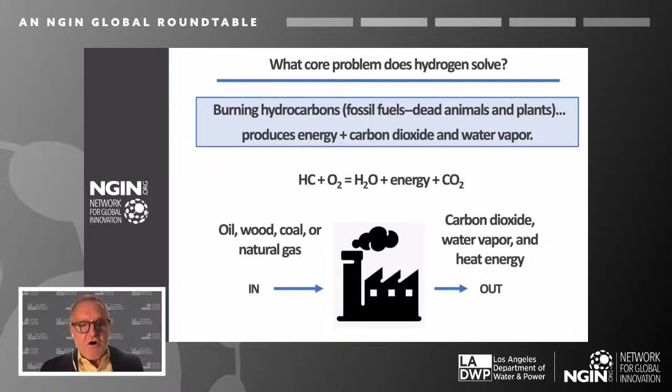In every fossil fuel plant, when we burn hydrocarbons, we produce carbon dioxide, and that's the core problem we want to solve. We want to get rid of the carbon in energy production.

So let's say we just burn hydrogen, which is combustible all by itself. You can see in this new formula that all we get out is water vapor and energy, no carbon dioxide. So no carbon in, no carbon out, no carbon dioxide.

One way to do this is in a gas turbine, very similar to the turbines that we currently use to burn natural gas or methane. The turbine has to be modified to deal with the higher temperatures in burning hydrogen, but the process is pretty much the same. We turn the chemical energy of hydrogen into heat, which produces the mechanical work of the turning turbine, which drives a generator, which produces electricity.

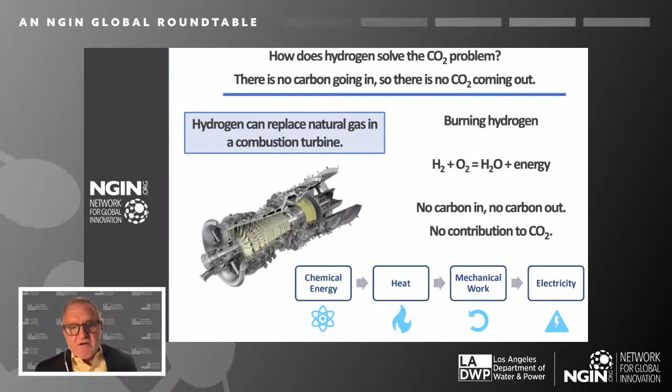Now, there is another way to burn hydrogen, and that's through the chemical reaction inside of a fuel cell, skipping the heat and mechanical energy steps. But the chemical reaction is the same. Hydrogen is combined with oxygen from the air, producing water and energy, in this case, electrical energy directly. Hydrogen in, water out, with no combustion and no carbon dioxide.

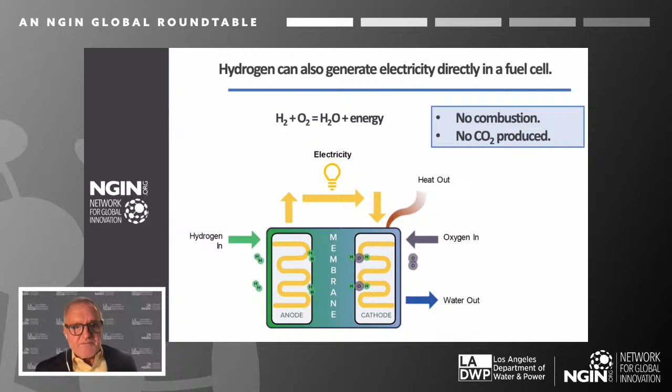So hydrogen can be used to generate electrical energy in a combustion turbine or a fuel cell without producing CO2. Kevin Peng will go into a lot more detail later in describing a LADWP project that does just that.

But hydrogen has a much larger role to play in removing carbon from the atmosphere. The mechanical energy from hydrogen can be used directly or indirectly for transportation. We can provide combustion heat for use in industry, like cement kilns or for heating buildings. And hydrogen is already used for industry as feedstock for fertilizers, plastics, and glass.

But perhaps the most important near-term factor in commercializing hydrogen technology is hydrogen's use in storing electricity from renewable energy. We can use the variable inputs from solar, wind, and hydro to make hydrogen, and then store hydrogen indefinitely and deploy it to provide a supply which is in line with demand. And we can do this on a very large scale and for longer durations than we can with batteries.

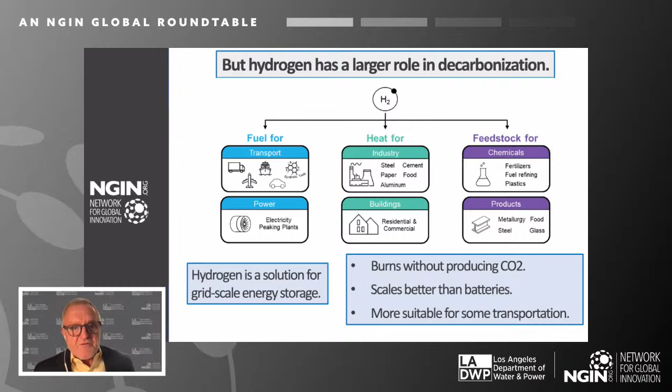So let's have a look at what a hydrogen grid might look like. In the upper left-hand corner, under production, you'll see renewable energy sources which drive hydrogen production in electrolyzers. We'll talk about electrolyzers in a minute, but basically electrolyzers split water, H2O, into hydrogen and oxygen and send the hydrogen through pipes or storage tanks where it's needed.

We can store vast amounts of hydrogen in underground caverns and further deploy hydrogen for use in utility scale electric production, industrial uses, transportation, or for buildings for heat.

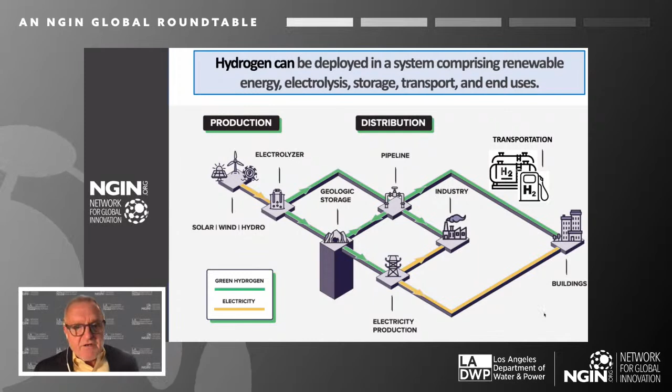One big advantage that hydrogen has over other molecules like natural gas or gasoline is that we can store more energy in a given weight of hydrogen than we can, say, in gasoline or diesel. This is known as energy density. However, hydrogen is a gas at ambient temperature. It takes up more volume than, say, gasoline, so that's a disadvantage. We can partially compensate for that by compressing hydrogen gas so it takes up less volume.

In a hydrogen-driven car, for example, we compress the gas to about 700 bar, or 10,000 pounds per square inch, before we pump it into the car's hydrogen tank. That fuel tank is about twice as big as the one in a gasoline car for the same range, but it weighs a lot less. So there are advantages and disadvantages. But the main advantage of hydrogen is that no carbon dioxide is released, and its fuel tanks are still a lot smaller than the batteries take up in, say, an electrical vehicle, which is also carbon-free.

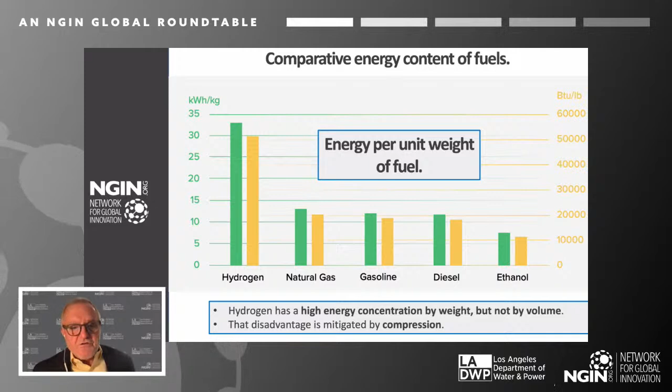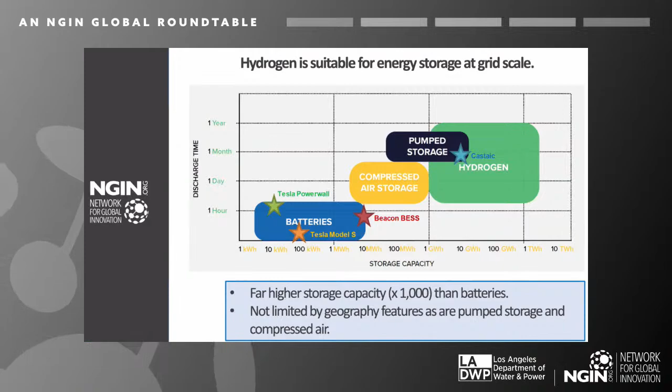If there's one key lesson in this entire presentation, it's the importance of hydrogen in energy storage. Renewable energy from solar and wind cannot produce a carbon-free economy without massive energy storage. We all know that solar and wind are variable and are not matched with demand. That's true both on a daily basis and also on a seasonal basis over periods of months. So we need very large-scale energy storage to make renewables work.

Batteries are only good for small storage in the 1 megawatt hour range and good for hours at a time. We can compress air into underground caverns and release that air to drive turbines on a scale of about 1,000 megawatt hours. But that's limited by geographical features and shorter scale, like a day.

In pumped hydro, renewable energy can supply energy to pump water, say, from a river up to a mountaintop reservoir, and it's released back to the river to get back that electricity over longer periods of time, but still limited by available geographical features. The stars on the chart above are examples of storage systems. Beacon and Castaic, for example, are LADWP projects, by the way.

One is a utility scale battery and the other is pumped hydro. But only hydrogen can store energy in the hundreds of gigawatt hours and for periods of months. So if hydrogen is going to be required to enable renewable energy to fill its ultimate mission, then a hydrogen infrastructure is inevitable. This is why hydrogen cannot be discounted in a carbon-free, environmentally sustainable future.

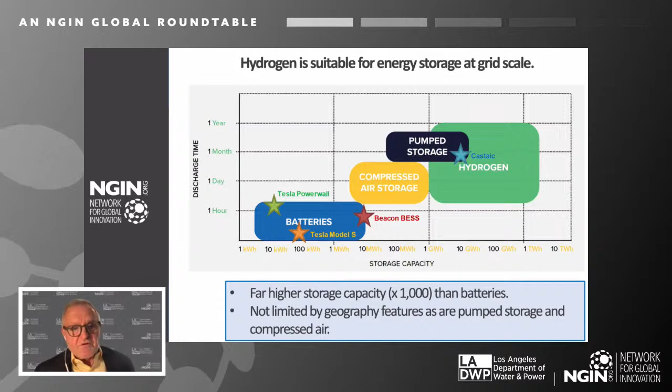So how is hydrogen used today? Virtually all hydrogen, like 100%, is used as chemical feedstock. About half of that is for producing petrochemicals, and about 40-some percent for producing ammonia, and most of the ammonia is used for fertilizer. We'll talk more about ammonia later. But as of today, far less than 1% of hydrogen is used for power and transportation, and that has to change.

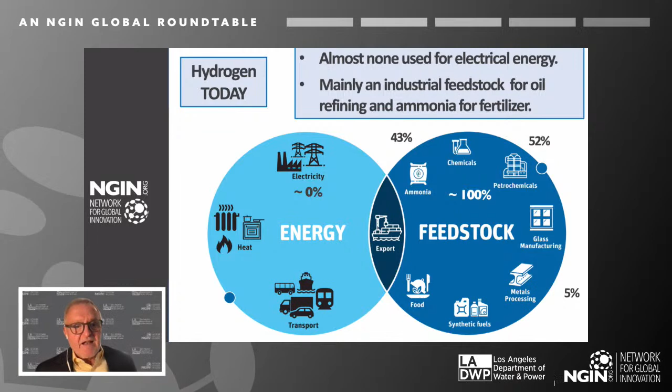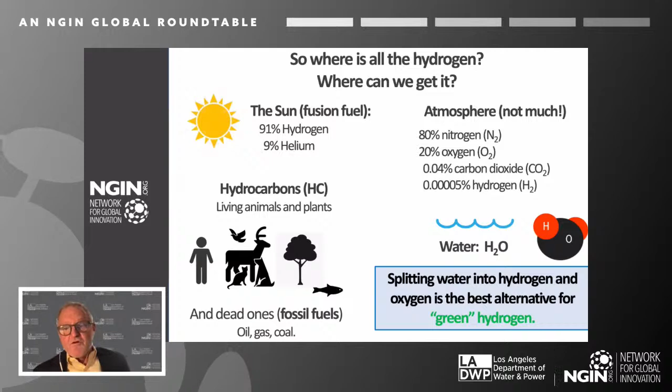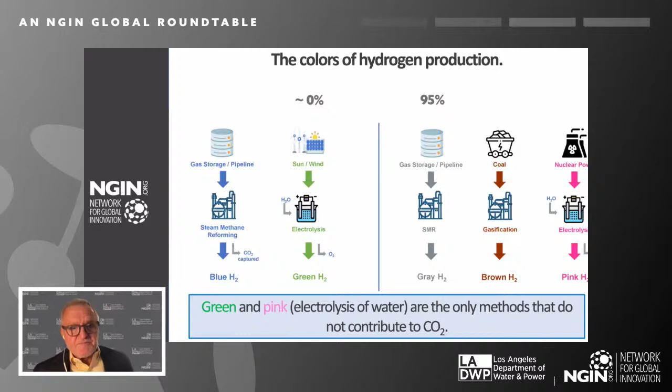I do want to show how methane reforming works, because almost all hydrogen today is used in this process. We start out with methane, CH4, and that's essentially natural gas. We mix methane with steam, go through some processes, and at the end of that process, we end up with hydrogen. But because we have carbon going into the process through the methane, carbon's got to come out of the process, and it comes out using CO2. Of course, this defeats the whole purpose of making hydrogen for clean energy, because we've already released CO2 into the atmosphere before we get the hydrogen. Again, we can capture some of that, but not all of it, and there are methane losses along the way.

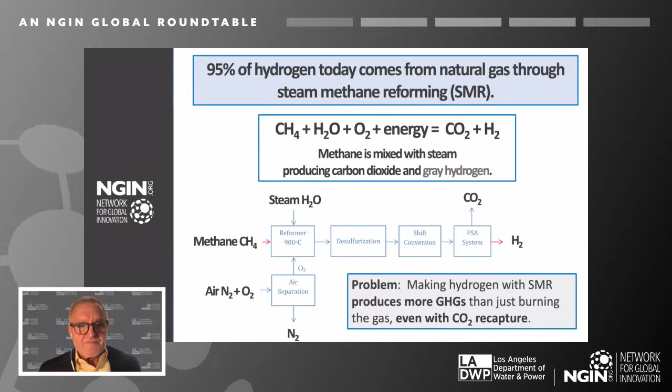Green hydrogen... oops.

So finally, here's how we make green hydrogen, in a system called an electrolyzer. We use electricity to split water molecules into hydrogen and oxygen. When I was on submarines years ago, we were underwater for 3 months at a time, and we had to make our own oxygen. We used exactly the same process, except that we pumped the hydrogen overboard and kept the oxygen to breathe. Electrolyzers do the same thing, except that we release the oxygen to the atmosphere and keep the hydrogen. About 80% of the cost of producing hydrogen in this method is the cost of the renewable energy used to power the electrolyzer. And as Fred indicated, the cost of that renewable energy is going down every year.

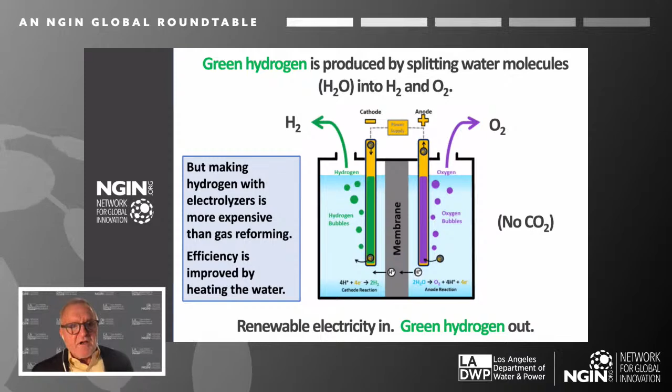The process itself is being improved, for example, by using waste heat from industrial processes to heat the water in the electrolyzer, so it takes less electrical energy to break up the water molecules. So we're improving the economy and efficiency of producing green hydrogen every year.

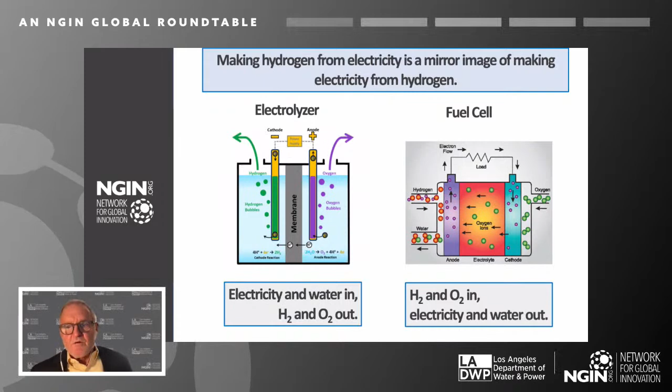In this slide, you can see the electrolyzer we just discussed next to a fuel cell we reviewed earlier. As processes, they are mirror images of each other. To make hydrogen, an electrolyzer takes electricity and water in, and produces hydrogen and oxygen out. In a fuel cell, it's the opposite: hydrogen and oxygen in, electricity and water out.

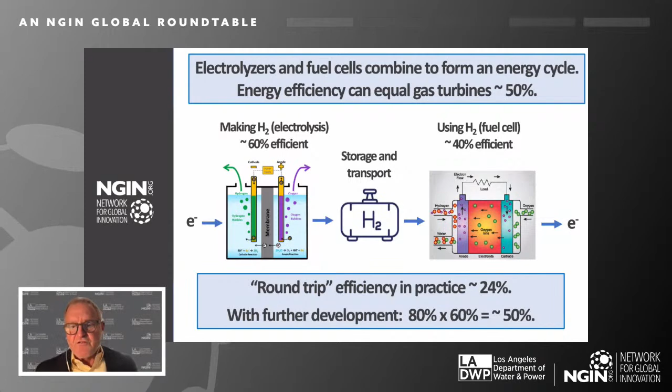It's not great, but it's all driven by solar and wind, and no CO2 is produced. With further commercial development, we can double this efficiency, and many companies are on the way to achieving this goal. Well, back to energy production.

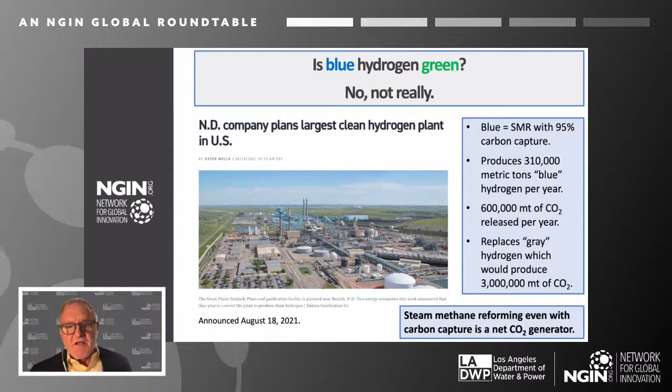As Kevin Peng of LADWP will confirm later, we're interested in green hydrogen in the form of electrolysis. But you'll hear a lot about blue hydrogen from methane reforming and carbon capture. Yes, blue hydrogen is cleaner than gray hydrogen without carbon capture, but the net effect of blue hydrogen is still more CO2 in the atmosphere.

On one positive note, the United States infrastructure bill working its way through Congress does support hydrogen infrastructure, but the bill defines clean hydrogen at a level that will subsidize not only green hydrogen, but many blue hydrogen systems. Many environmentalists would rather see the bill support only green hydrogen production.

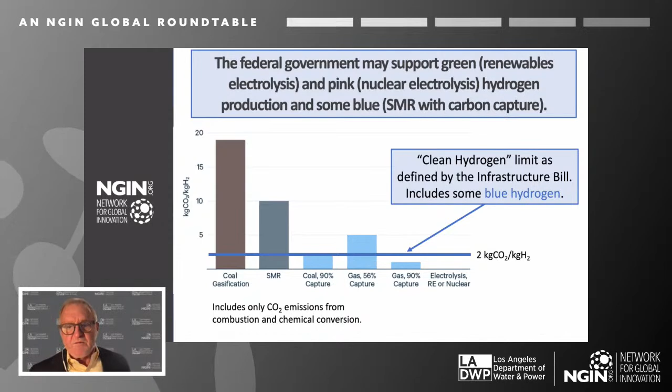The future of the hydrogen economy involves a lot of niche subjects, and one of them is ammonia. I already mentioned that almost half of hydrogen today is used to make ammonia, mainly for fertilizer. What's interesting about ammonia is that it carries a lot of hydrogen, three atoms worth with every nitrogen atom, and no carbon is involved. Ammonia is also a liquid at ambient temperature, so it's a convenient way to store and transport hydrogen.

We can make ammonia from green hydrogen, ship it across the ocean, and then economically convert it back to hydrogen, releasing the nitrogen and not producing any additional CO2.

Later this morning, Professor Blechman will talk about the specifics of hydrogen and transportation. But as an introduction, pretty much every form of transport is developing hydrogen alternatives. You're most familiar with hydrogen cars, already in the market, using compressed hydrogen tanks to power fuel cells that drive the car with electric motors.

Hydrogen trains are already in use with similar power systems. Some smaller ships use compressed hydrogen, but larger ships will probably use liquid hydrogen instead of compressed gas. And Airbus has committed to having a hydrogen-powered commercial jet in use by 2035, using liquid hydrogen stored behind the passenger section, shown in dark blue in this rendition, to drive hydrogen turbojets.

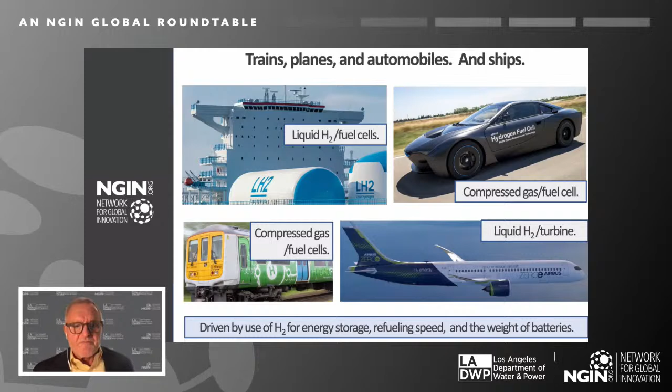So what does a hydrogen powered car look like? Hydrogen is pumped into a high pressure gas tank at about 10,000 PSI, or about 700 bar. The hydrogen drives fuel cells, which generate electricity, which powers an electric drive chain.

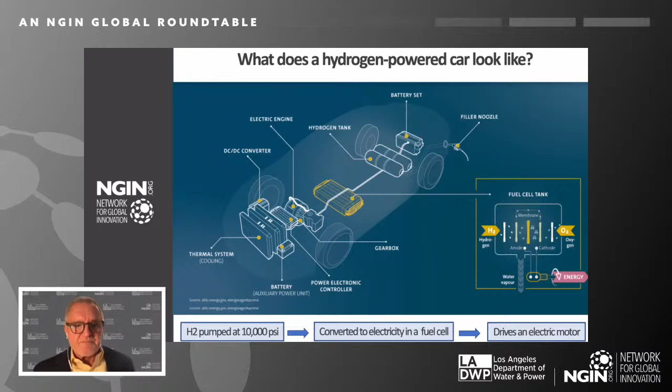Now, if you want to compare the efficiency of an electric vehicle to a hydrogen automobile, this slide shows that the hydrogen cycle, from renewable energy generation to power the wheels, is less efficient than the electric vehicle. Why? Because in the electric vehicle there's no conversion back and forth from electrical to chemical energy as with hydrogen. But hydrogen does have advantages: faster refueling, longer range, less weight, and a smaller volume than batteries.

And batteries today will typically not last the life of a car, so they need replacement, increasing the capital cost. But ultimately, the forcing function, as I mentioned before, is that renewable energy is not dispatchable at utility scale without storage. And that storage will probably be hydrogen in the long term, and that will drive the hydrogen market.

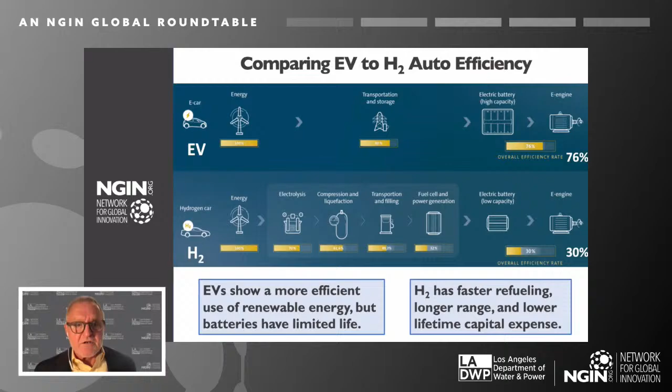So I'll summarize that hydrogen is driven by the storage requirement, and why now is also driven by the storage requirement if we were to make the total transition to renewables. Yes, there are other reasons, like cost factors, but major governments are realizing this and are driving the hydrogen train. The European Union, UK, Japan, and Australia are also on board, and the US will ultimately head in that direction either sooner or later.

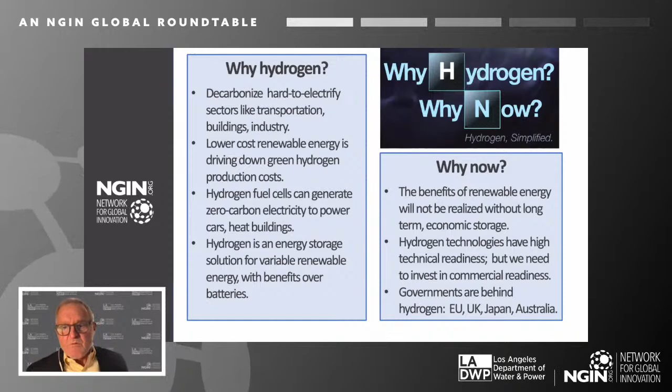Okay, so now we're going to move from the basics of understanding hydrogen to one of its most important applications, which is in the generation and storage of electricity. The Los Angeles Department of Water and Power, the largest municipally owned utility in the country, has been doing a lot of work in that area. Many of you may know we've had a partnership with LADWP back from my days at LACI. This year, LADWP did a study and released the results called the LA100 study, which looked at 5 different paths for the utility to get to 100% renewable energy with no carbon. It was a very brave study, and I urge you to go look at it. The result was that in every path, hydrogen had a role to play in either generation or storage of energy.

So I'm really pleased today to have Kevin Peng here, who is the project director of the Intermountain power generation project, which simply stated is they have a coal plant in Utah and they're going to try to decommission it and make a hydrogen plant out of it. Leading edge stuff. So Kevin, thank you for coming, and it's to you.

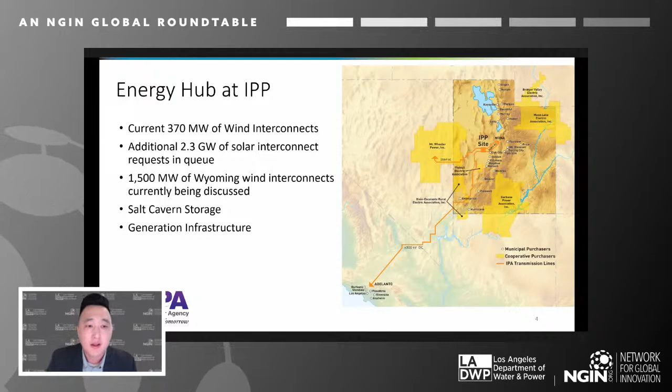So when we look at what this energy hub really means and why it makes sense here, even geographically: we currently have 370 megawatts of wind interconnects that bring wind energy directly to the IPP station, and an additional 2.3 gigawatts of solar interconnect requests in the queue. Those solar interconnects can bring energy directly into IPP, either to serve the electrolyzers or to serve native load for our participants. In addition, we have 1,500 megawatts of Wyoming wind interconnects being discussed and evaluated as part of our long-term resource planning group.

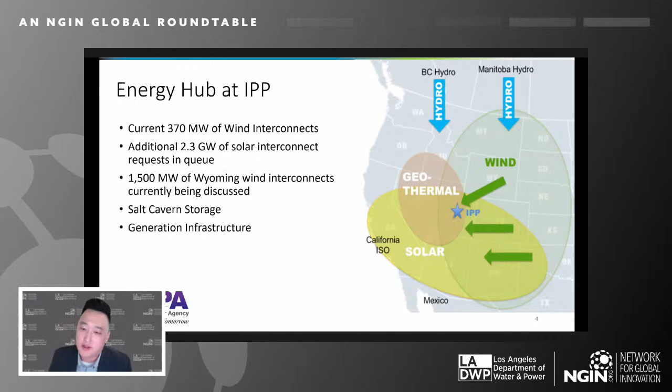And obviously, all of this proximity means we have a lot of renewables that we can potentially access. I had highlighted these salt caverns directly across the street, which allow us to integrate all of those renewable energies in the event that they would have been curtailed. In the surplus months, we can store that energy inside those salt caverns and shift it to the deficit months when we need it most.

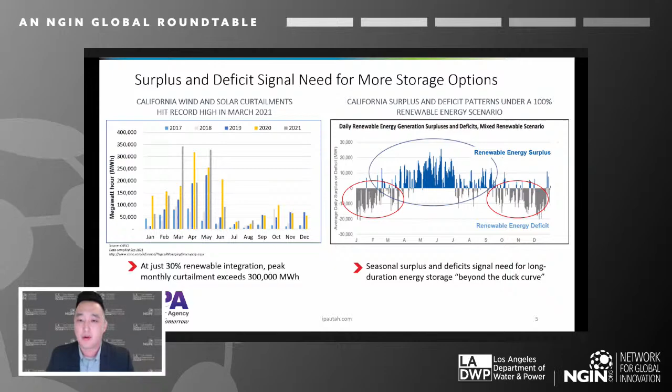So what a project like IPP can do is provide true long duration grid level energy storage. But the most important part is really the ability for us to shift renewable energy from the surplus months, where we have excess capacity being curtailed, over into the months where we need it most, where renewable energy is at a low.

Bob had highlighted, and this was a very important point for us, that the only hydrogen IPP is interested in pursuing is really green hydrogen, for all the reasons he had listed in his presentation.

Everything in the middle of electrolysis and storage, that's really where we get long duration energy storage. That's where we get the seasonal shifting, these month-long durations of storage. It gives us an opportunity to tackle some of the challenges we see with renewable energy integration, and eventually reach a 100% clean grid in LA.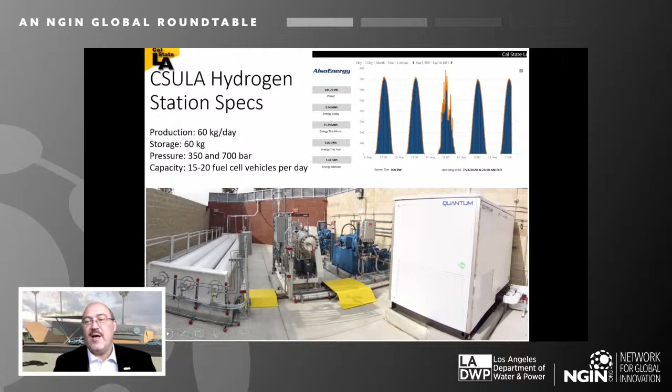One of the studies we conducted after several years operating our hydrogen station is putting together a failure-by-component map. We accumulated over the years what was failing from our journal and other reports. One summer I had a very talented high school student who put together these graphics and helped us have a more holistic look at how a hydrogen station, which is technically a complex plant, operates.

We have computers, we have sensors, we have heavy duty equipment. What was failing and when - you can see the red bars represent component failures in year one that needed a lot of things to be addressed.

Then year two, we had problems with the dispenser. Year three, we started having problems with the chiller and the electrolyzer; we had to address certain things as we moved along over the years. But you can see by year four, a lot of those failures and teething problems we were able to overcome.

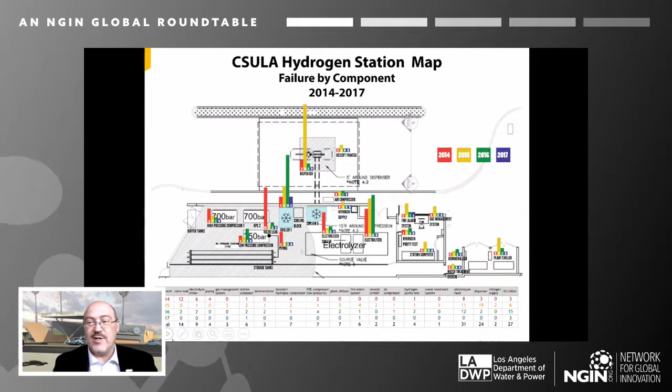What we learned is that you need an inventory of parts, and a map like this allows you to think through what parts you would need to store for immediate replacement. Otherwise, you might be waiting a few weeks to get replacement parts from the manufacturer. We helped other stations and they returned our parts back, but sometimes we lent our inventory to others.

Another interesting program we were able to introduce is a shared mobility program that faculty and students could take advantage of. We started it late in 2018, and unfortunately, due to COVID, we ceased the program. But at its height, it was operating 18 vehicles, very popular, and it also created additional usage for our hydrogen station, so we could reap certain benefits.

For example, we did studies when we fueled cars back to back, early in this learning process about operating hydrogen stations.

Now we are operating 7 vehicles and the rest we returned to Hyundai, but we really appreciate that opportunity to work with Hyundai in their first generation Tucson fuel cell vehicles. They were very reliable, very simple to operate.

We did many hydrogen projects, and I just wanted to show you one of the interesting highlight projects that was sponsored by the Metropolitan Water District of Southern California. It was a senior design project. I tasked students to design a passive cooling device that would capture water from the exhaust of a fuel cell vehicle. As Bob introduced, hydrogen and oxygen combine in a fuel cell to produce electricity.

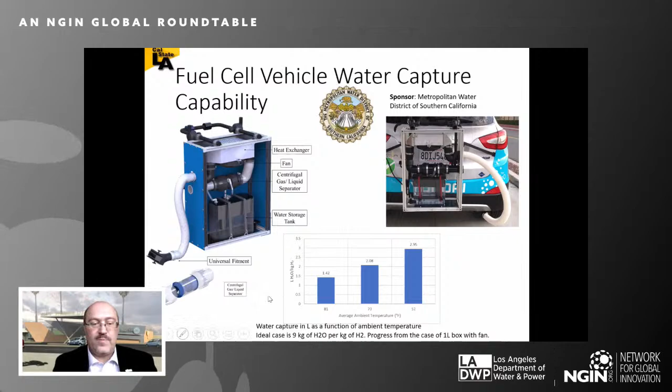So hydrogen can be effectively utilized in residential, industrial environments. In Sweden, I visited people who were using hydrogen to produce high quality steels, reducing it without coke. And also ammonia production and many other applications in industry, and also in commercial buildings using just fuel cells.

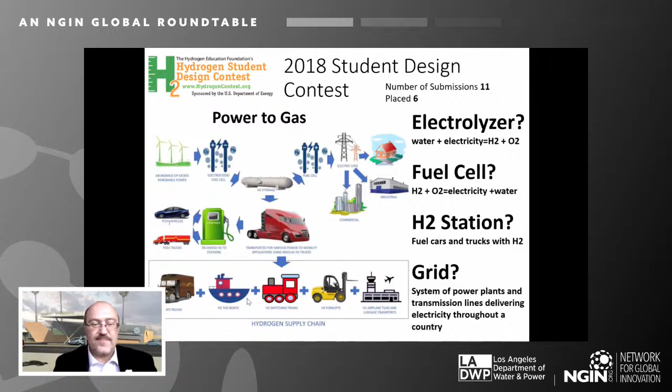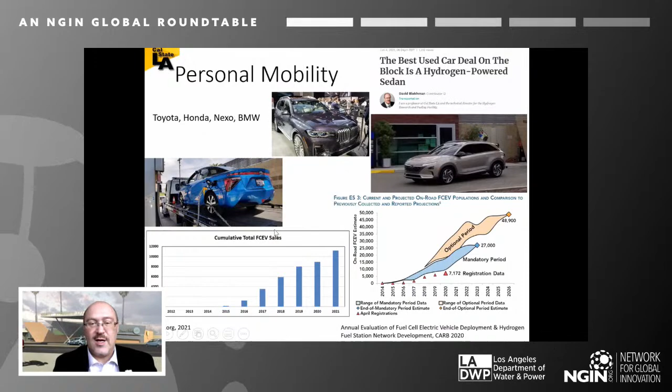So why is it a great choice? Because we refuel in 3-5 minutes, an electric car can't match that. And also we have a great distance of 300 to 400 miles per single fueling on these cars. So that's a very important advantage of those cars.

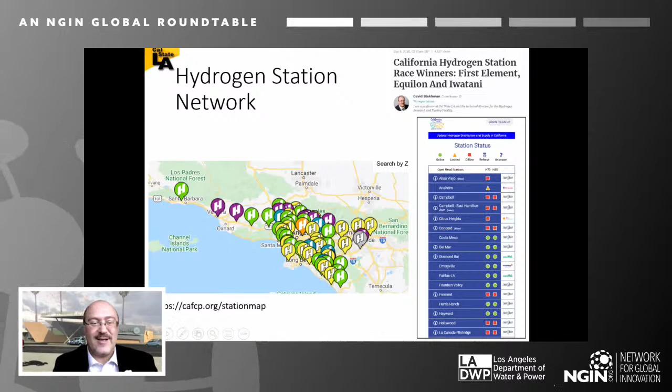And we're building a very extensive hydrogen network. You can see green stations are open stations, and yellow and purple are planning and in construction already. Our drivers can see where hydrogen is available, it's a picture on the right with locations marked in green and red. I took this snapshot from the website at night, so some of the stations are out of hydrogen and some of them are just closed for overnight. For example, our station closes after 5 p.m.

What is unique about Toyota is they are utilizing their own fuel cells from the Mirai, putting two Mirai fuel cells in a truck. This actually makes a more efficient, more durable power plant, and it also increases the volume of fuel cells they produce and improves reliability, because it's a very known technology. As a matter of fact, in the secondary market for fuel cell vehicles, Toyota guarantees 100,000 miles on the fuel cell plant.

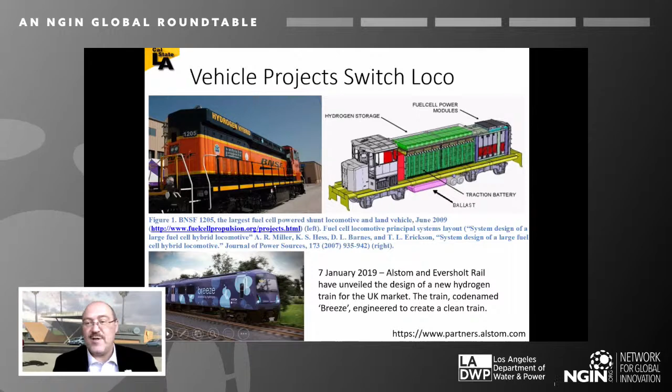A dear story of hydrogen is fuel cell forklifts. That's a winning story over electric forklifts, because now in 24/7 operation, we can refuel a forklift in 3-5 minutes instead of hours and hours of recharging an electric vehicle. So Amazon, Sysco, Walmart are all purchasing hydrogen forklifts now and adapting them into their logistics facilities.